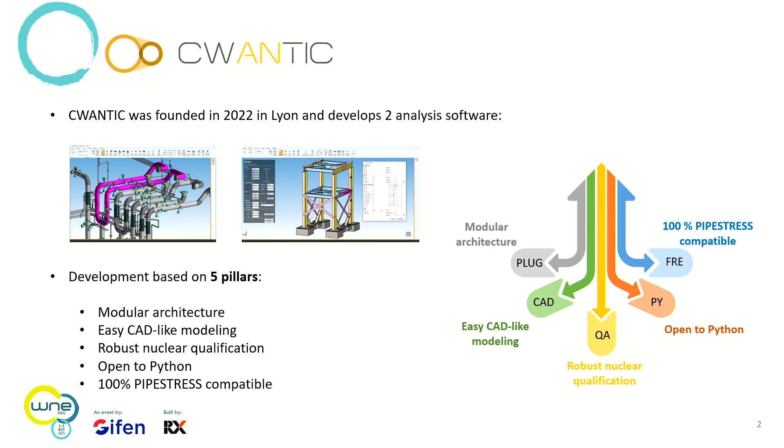Let's come to the core of the presentation, the RCC-MRx code. The RCC-MRx code is a French code that provides rules for the construction and design of high temperature equipment. It's particularly aimed at applications like high temperature SMRs.

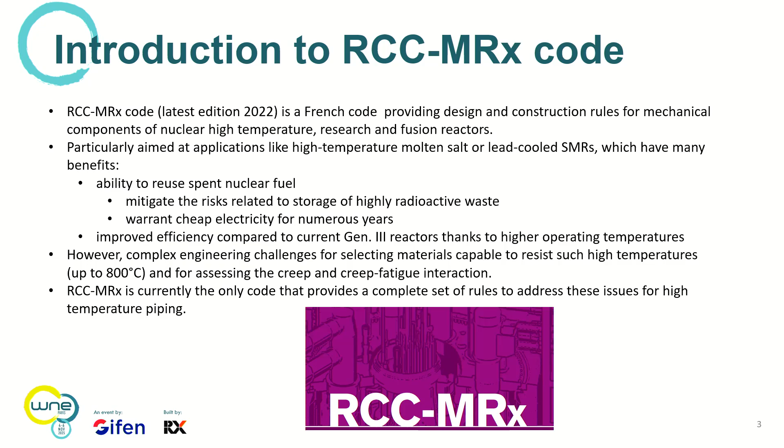As you know, they have many benefits: the ability to reuse spent nuclear fuel, improved efficiency compared to the current plants, Gen 3, because of the higher temperature, of course. However, it comes with many complex challenges.

The first challenge is to select materials able to resist such high temperature. The other big challenge is to assess creep and creep fatigue interaction. As far as I know, the RCC-MRx code is the only code currently that provides a full set of rules to address those issues, and that's the reason why we decided at CWANTIC to implement the code into our software MetaPiping.

I'm not going to give you a lesson about the RCC-MRx code, it would take hours and hours, but just two very important topics addressed in the code. The first topic is creep and creep plus fatigue interaction.

For steel, creep is significant above a temperature of about 450 degrees. Creep can lead to progressive deformations and then to rupture, so it has to be drastically limited. In the RCC-MRx code, this is assessed by means of two numbers: the creep usage factor U and the creep rupture factor W.

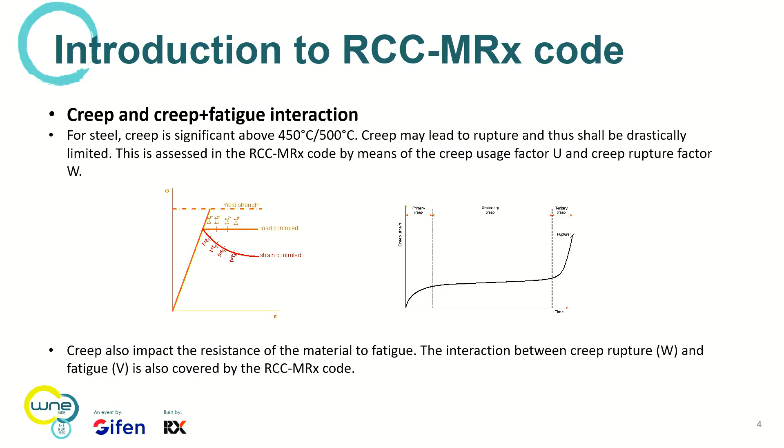We also have to take into account creep for the fatigue analysis, because there is an impact of creep on the fatigue resistance of the material. This is assessed in the code by means of the interaction diagram, fatigue and creep.

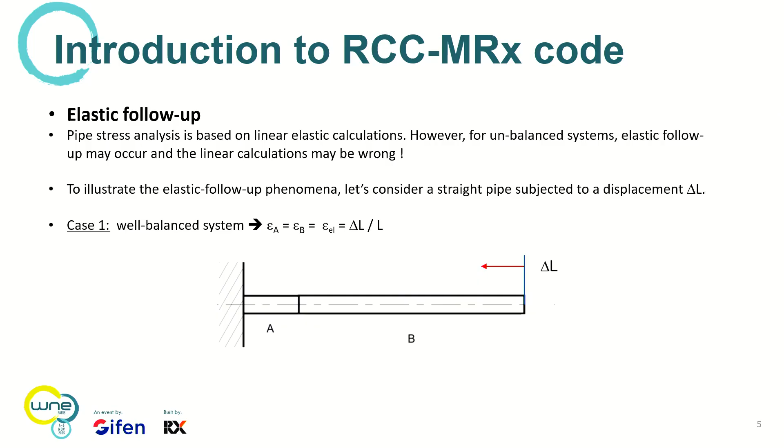Another important topic in the code is what we call the elastic follow-up phenomena. As you may know, pipe stress analysis is based on linear calculations. However, that can be unconservative and wrong if the system is unbalanced. I'll give you a little example to illustrate that.

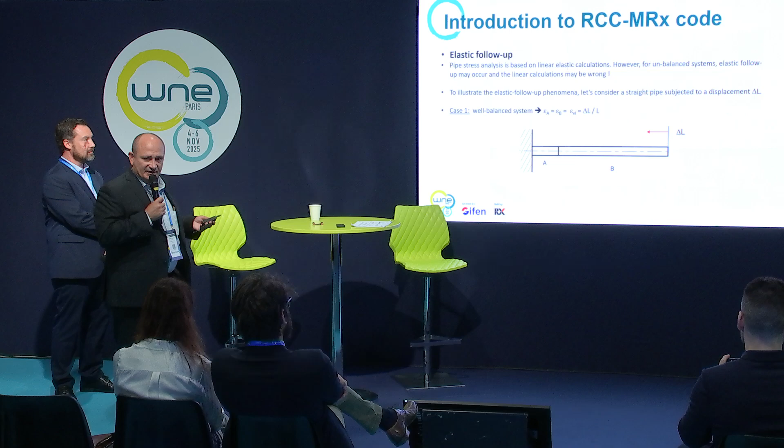In the first case, we have a perfectly well-balanced system. Part A and B have the same cross-section. So if you apply a loading, for example a displacement delta L, the strain calculated elastically will be the same as the real strain. Now, the second case is an unbalanced system.

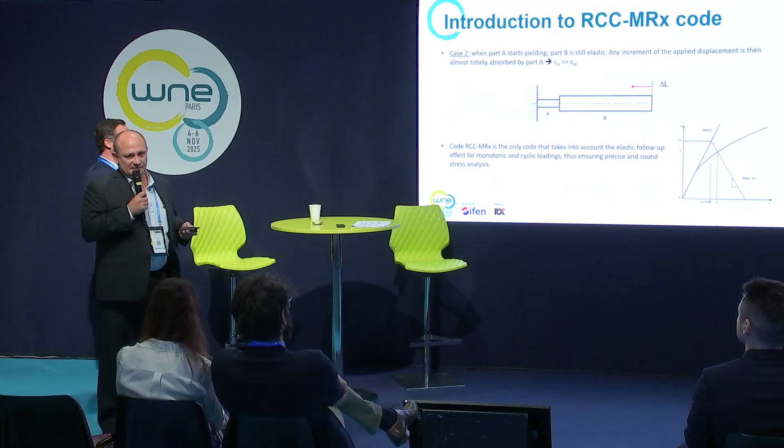The cross-section of part A is much smaller than the cross-section of part B. If you apply a loading, for example a displacement, the strain calculated elastically will be unconservative. It might be much less than the actual strain. So if you want a sound and precise analysis, you have to take this phenomenon into account.

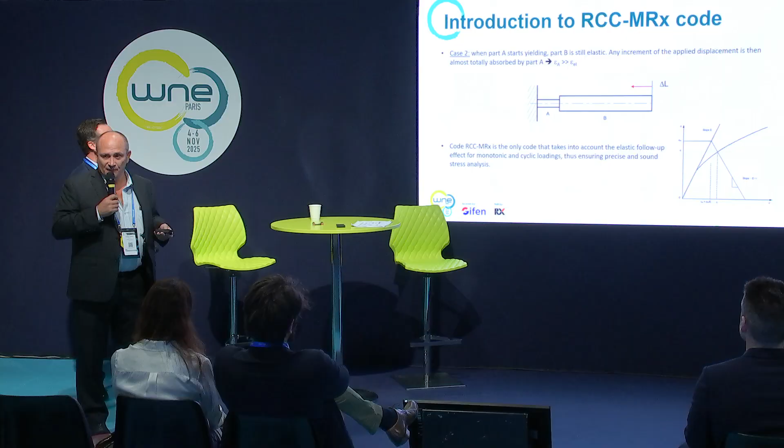The RCC-MRx code provides some methods to take this phenomenon into account, by means of what we call the elastic follow-up factors for monotonic and cyclic loading.

Let's have a look now at the implementation of the code into MetaPiping. The first thing we had to do is build a library of materials, because for the RCC-MRx code we need a lot of data: the creep-fatigue interaction, the creep laws, the interaction diagram, and so on. It's practically impossible to have the user enter all this data, so we decided to build a library with most materials used.

And for the user, it's pretty easy. You simply have to select the specification, and all the data are readily available.

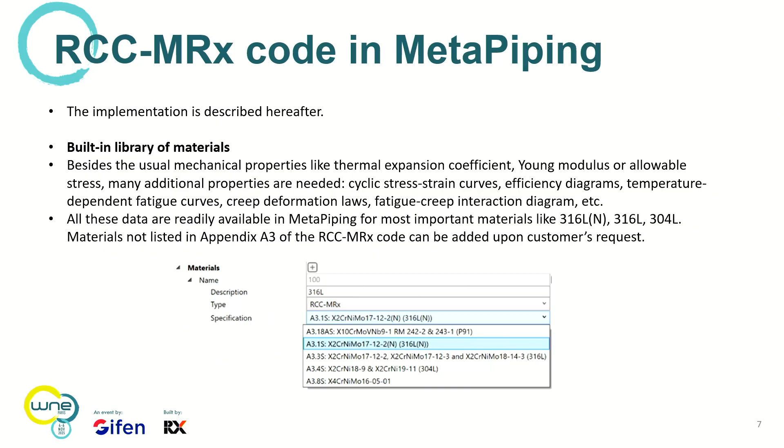The second thing we have to do is to define the geometry and the loading. That's pretty similar to what you have in other piping codes. There is no big difference.

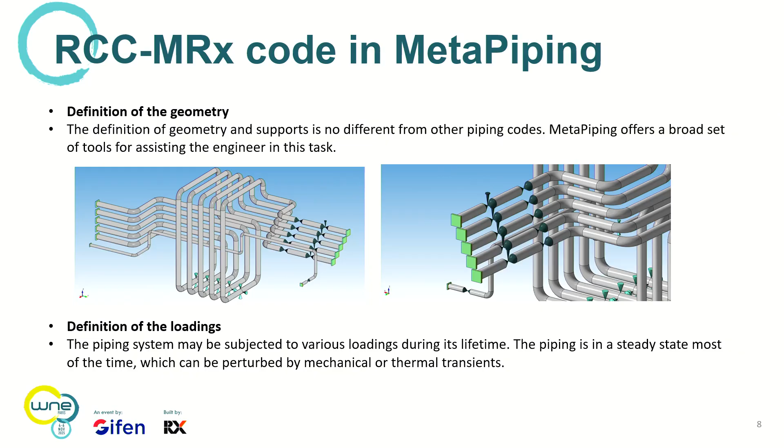However, you have to describe the steady-state conditions accurately, in particular the duration. It's very important for creep.

And the second thing you have to pay attention to is the definition of the transient conditions, the transients. In MetaPiping, this is done by means of what we call a load set. And the load set has to take into account the fluid transients. When you have a temperature of fluid transients, of course, you have thermal gradients across the thickness, and they have an impact on the fatigue, the cyclic analysis.

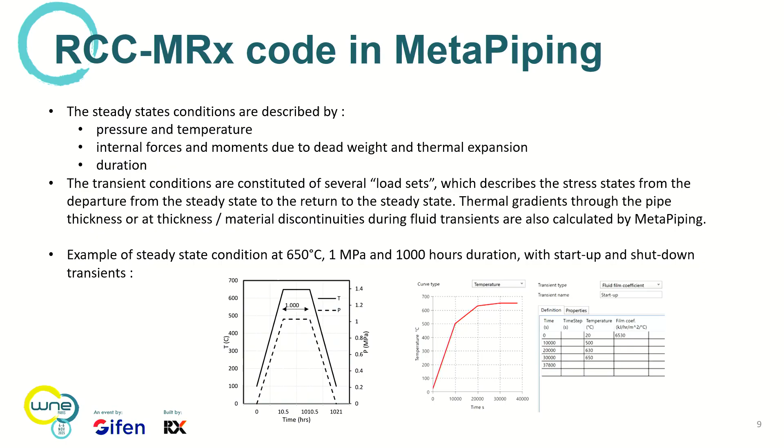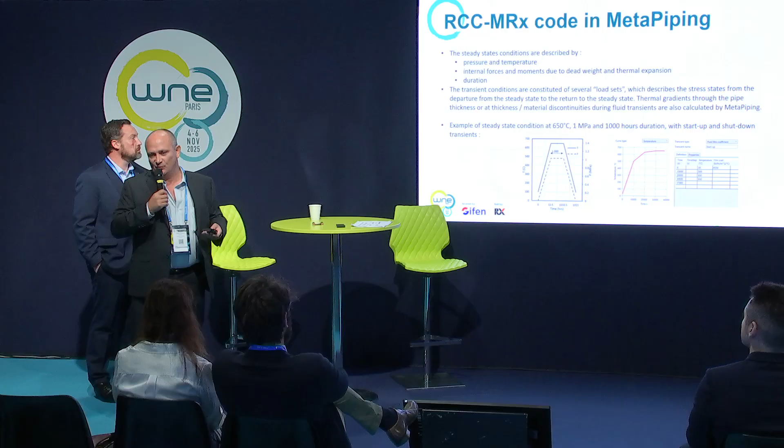And this is an example of steady-state conditions, 650 degrees, with two transients, startup transients, shutdown transients. In MetaPiping, that's pretty easy to define those transients, and automatically MetaPiping will take the thermal gradients into account in the cyclic analysis.

Once the loadings and the geometry and the materials are selected, we come to the calculation according to the RCC-MRx code. And the first thing that is carried out in MetaPiping is the check of significant creep. And that is performed according to Appendix A3.31.

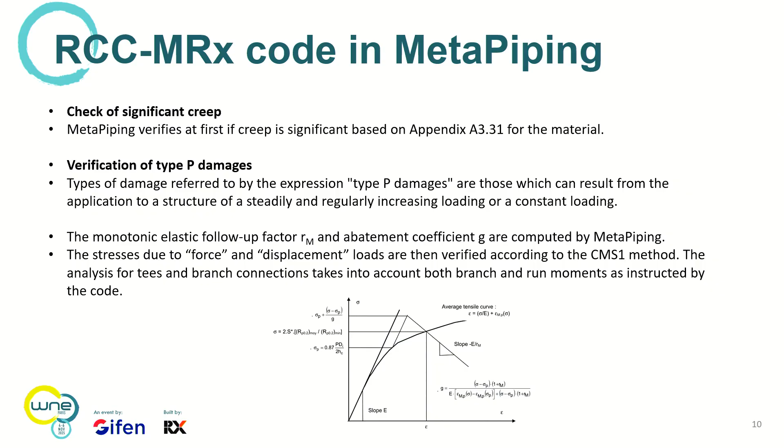The next step is the verification of the type P damage. So what we call a type P damage is a damage that is due to the application of a steady or almost steady loading. For example, thermal expansion, dead weight, and so on.

And to do that, MetaPiping calculates what we call the monotonic elastic follow-up factor, RM, and the abatement coefficient, G. And using those numbers, we are able to evaluate the stresses according to the CMS1 method. And then, of course, to make sure the damage are acceptable.

If creep is significant, we have also to evaluate the creep usage factor, U, and the rupture factor, W. And we have to do that for all the steady-state conditions. The creep usage factor, U, has to be lower than 1 minus delta UA.

And the calculation of delta UA is pretty complex. It's really complex. It involves a lot of iteration. And in MetaPiping, this is done in the most rigorous way, I would say, without any simplification.

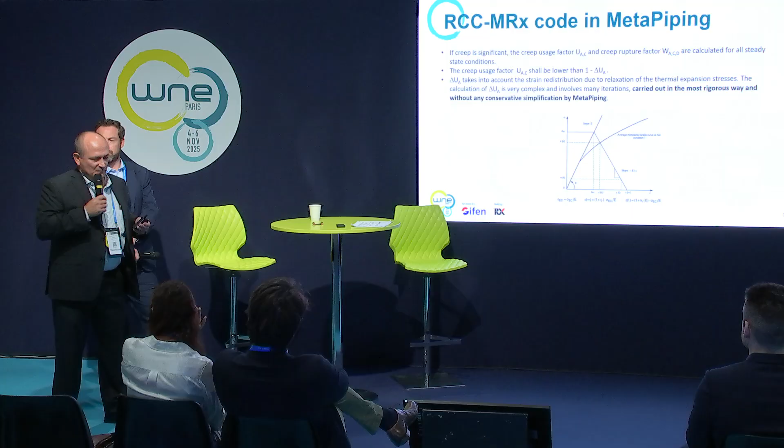The next step is the verification of type S damages. So type S damages are about stress variations. And in fact, there are 3 different failure mechanisms we have to verify.

The first failure mechanism is progressive deformation. Then the second, fatigue. And the last one is creep rupture.

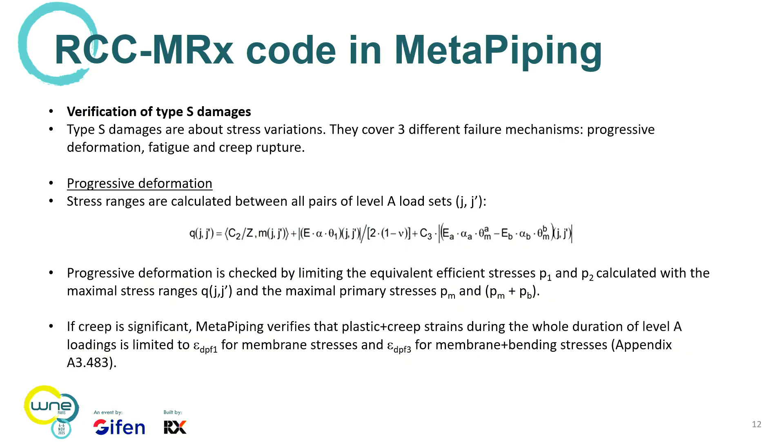So for the first mechanism, progressive deformation, MetaPiping will calculate the stress range that we call Q between all the possible states, all the possible load sets. And based on the maximum value of Q combined with the maximum primary stresses PM and PM plus PB, we determine the equivalent efficient stresses P1 and P2 that have to be limited to a maximum value depending on the material and the temperature.

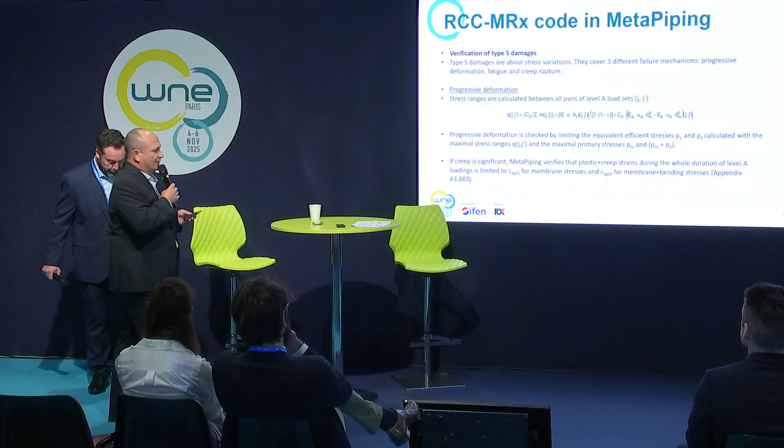If creep is significant, we also have to verify that the plastic plus creep strains during the whole level A loadings is limited to a value, epsilon delta P1 and epsilon delta P3, that also depend on the material.

So now we come to fatigue. The way fatigue is addressed in the RCC-MRx code is pretty similar to what you can find in other codes like RCC-M, ASME. So of course you have to determine the maximum, the peak stress variation between all the states, the stress states that we call SN and SP.

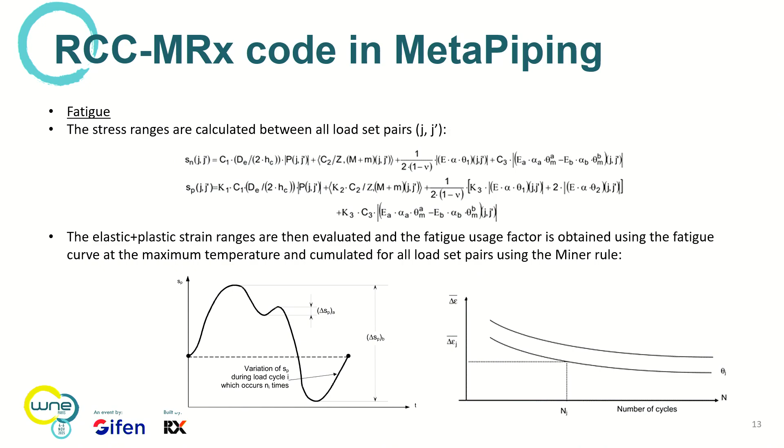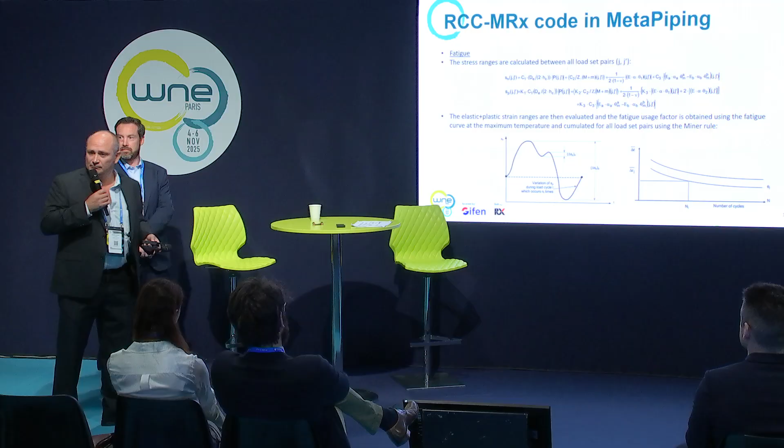And as illustrated in the diagram below, you have to figure out what is the maximum stress or strain variation between the load sets, enter the maximum variation in the fatigue curve, and then based on that, calculate what we call the cumulative usage factor using the Miner's rule. So that's pretty usual, I would say.

There is, however, a big difficulty when you do that, which is to avoid over-conservative counting of cycles. And this is illustrated in the figure here below.

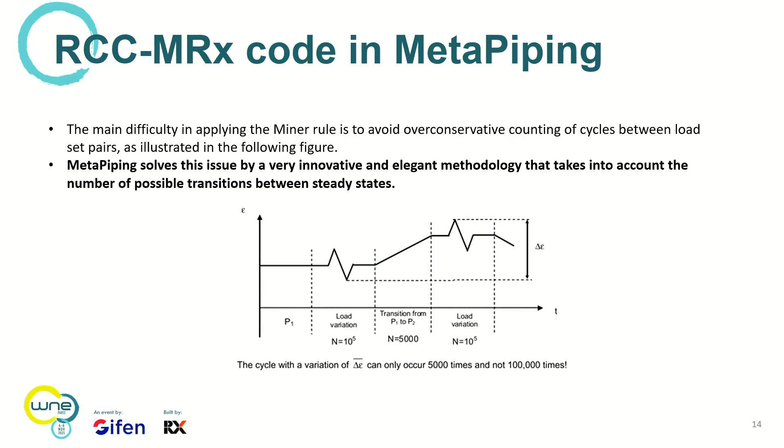Let's imagine that we have a steady state P1 and a transient that occurs 100,000 times. You have another steady state condition, P2, with another transient that occurs 100,000 times. So I have a quiz for you.

How many cycles can you form between the peak values, delta epsilon? Well, the first obvious answer is 100,000. Unfortunately, that's wrong, because the number of transitions between state P1 and P2 is actually limited to 5,000.

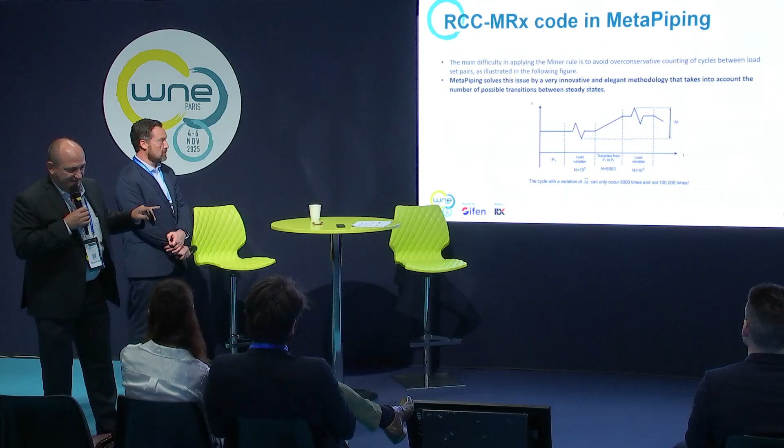So you can see that this has a huge impact on the fatigue analysis. And what we have done in MetaPiping is to identify the transitions between steady state conditions in order to take this issue into account.

Then we come to creep. If creep is significant, we have to check the strain due to creep in the holding time that follows a load cycle, and we have to take it into account in the fatigue analysis as well, adding the creep strain to the elastic and plastic strain.

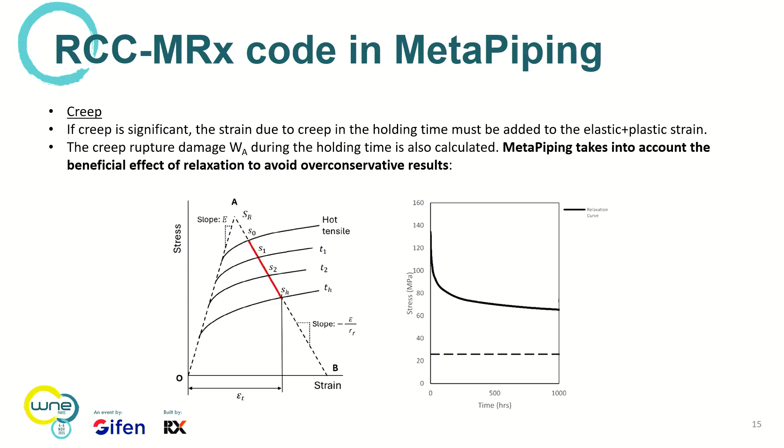There is another number we have to calculate: what we call the creep rupture damage, W, during the holding times. To do so, in MetaPiping, we take into account the beneficial effect of relaxation. In most software, you simply take the maximum value and consider it constant, which gives an over-conservative result. Here we really take into account the fact that the stress will decrease due to relaxation.

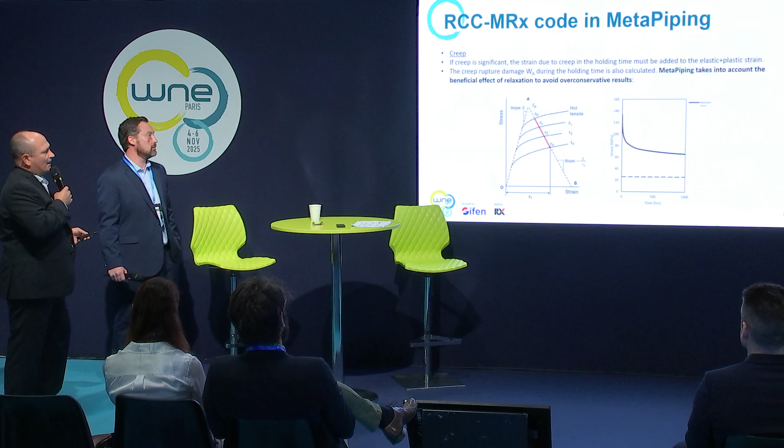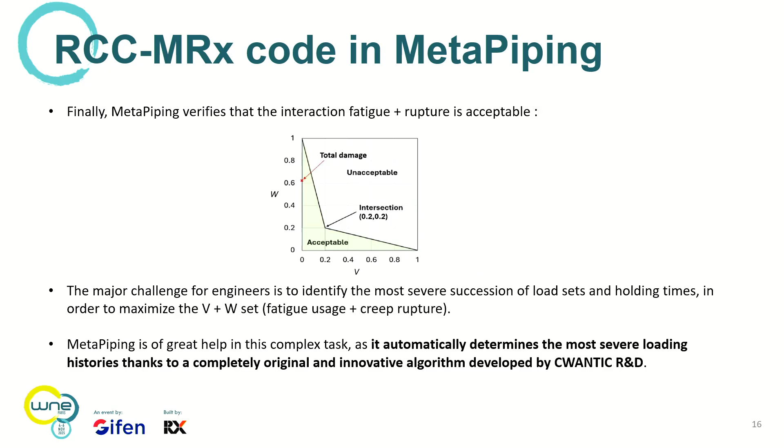You see that all this is pretty complex, a lot of calculations. But that's not the most complex issue we have to solve, because the code asks you to figure out what is the worst history, the worst succession of load sets and holding times, in order to maximize the V plus W set. That's an extremely complex issue.

In MetaPiping, we have developed a special algorithm, completely original and we think innovative, that allows us to determine this loading history in order to maximize the fatigue plus creep effect.

So now I let Mr. Noé speak about a real-life application of the MetaPiping software and the RCC-MRx code.

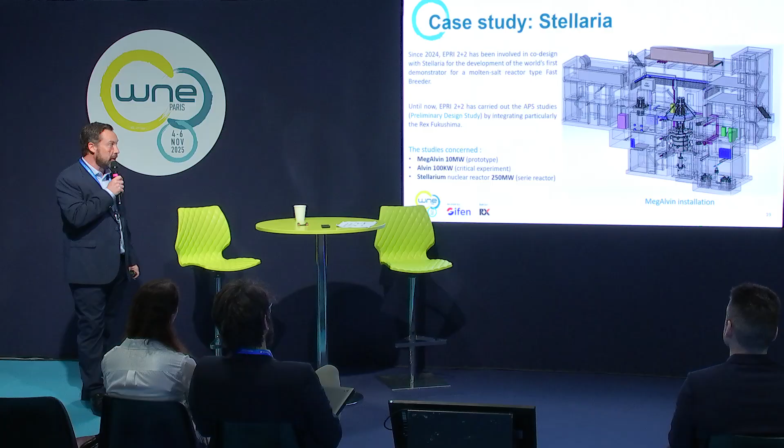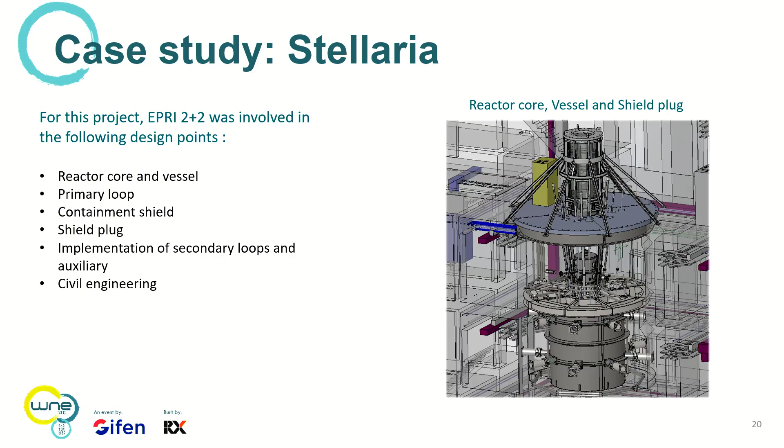Et donc nous, au sein d'EPRI 2+2, sur ce projet, on s'occupe de tout ce qui est développement du réacteur, en partenariat avec Stellaria, du réseau primaire, du château de plomb, de tout ce qui est réseau secondaire, et de l'implémentation du génie civil et des différentes protections.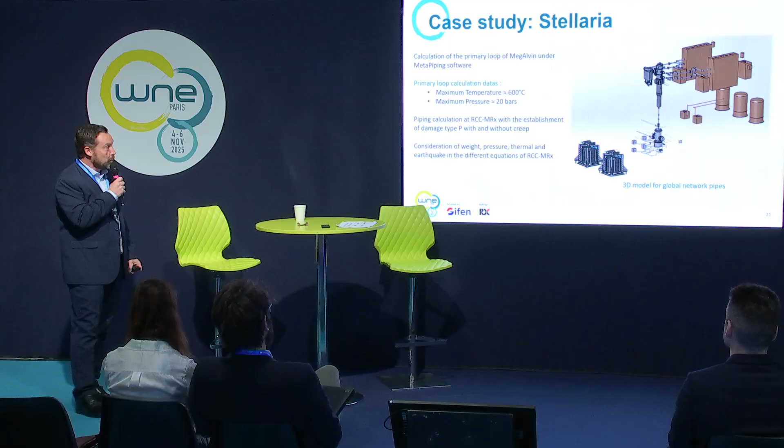Donc le cas d'étude qui s'est fait sous RCC, sous MetaPiping, c'est le calcul du réseau primaire de MegAlvin, avec des températures qui vont à plus de 600 degrés et une pression d'environ 20 bars. On a pu établir grâce au logiciel de CWANTIC les dommages de type P avec et sans fluage. Et donc on est en cours après pour la suite.

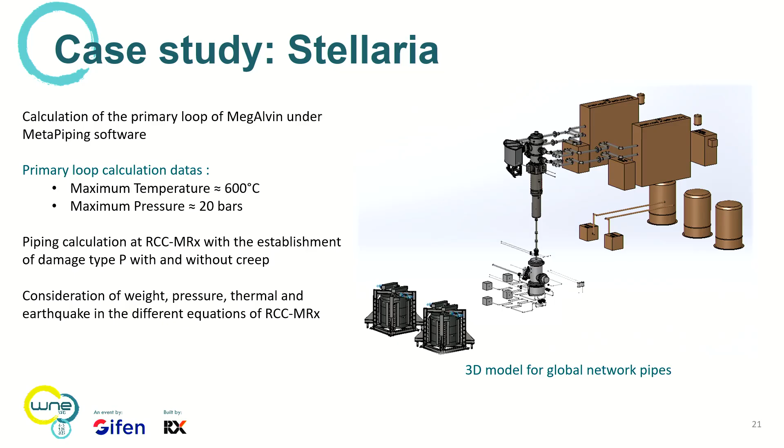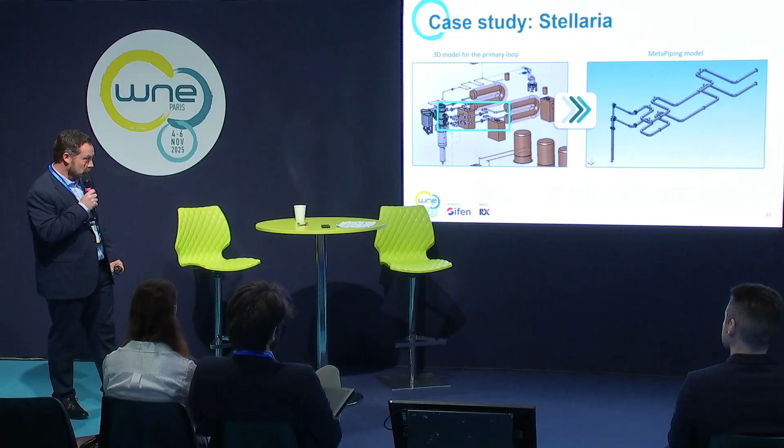Donc là on peut voir à gauche le 3D et à droite la modélisation que l'on obtient sous MetaPiping avec les différentes conditions limites. Et le cheminement avec des thermal loops, des lyres, qui ont déjà été mis en place, puisque là c'était après itération, et les différents supportages qui ont été mis en place.

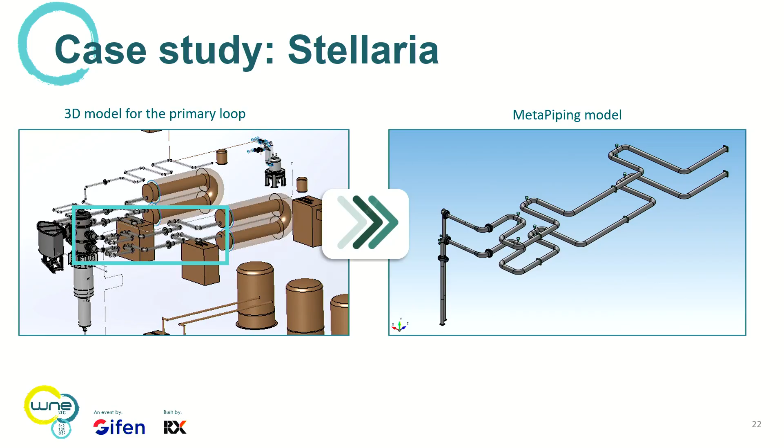Donc ce qui est bien avec le logiciel de CWANTIC, de MetaPiping, c'est que pour le calcul sous RCC-MRx, c'est la facilité de pouvoir établir toutes les équations qui sont faites presque automatiquement et avoir aussi tout le détail de tout, comme l'a expliqué Joseph, tous les facteurs qui rentrent en compte dans le calcul de ces équations, que ce soit le facteur d'usage, l'effet ressort.

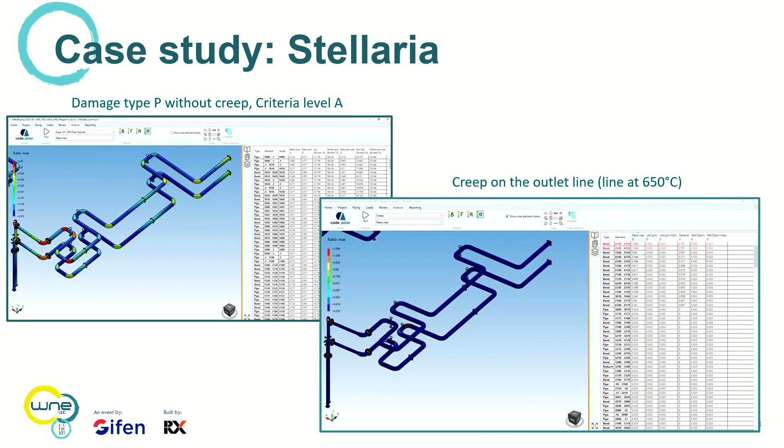Le coefficient d'abattement, le coefficient G, qui sont plein de coefficients qui rentrent en compte dans les différentes équations, que ce soit pour les dommages de type P, le coefficient d'abattement, le coefficient G rentrent beaucoup en compte dans les contraintes de type PM plus PB.

Et nous avons en bas à droite après le calcul en fluage, en dommage de type P avec fluage, pour les lignes à 650 degrés, donc là où on va calculer les UAC et les delta UA. Voilà, les différentes choses comme ça.

Je vais laisser la parole à Joseph qui va présenter le fonctionnement du logiciel.

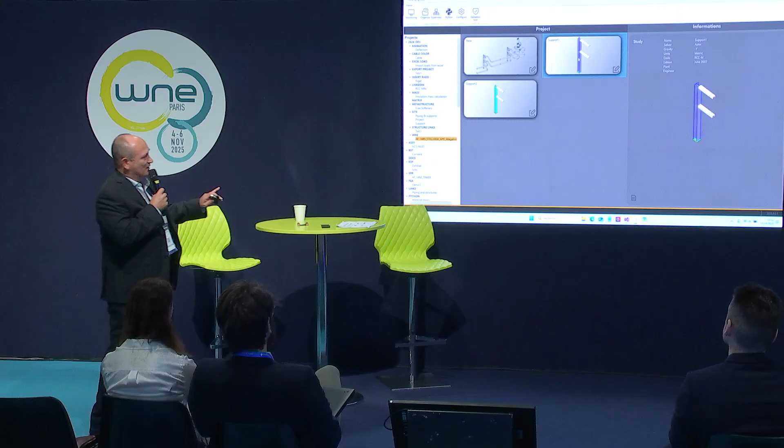Yeah, thank you. I would like now to show you a short demo about how the MetaPiping software works, or how it looks like. So that's the next video. You can see the project. In this case, it's a full project with the piping systems and the support.

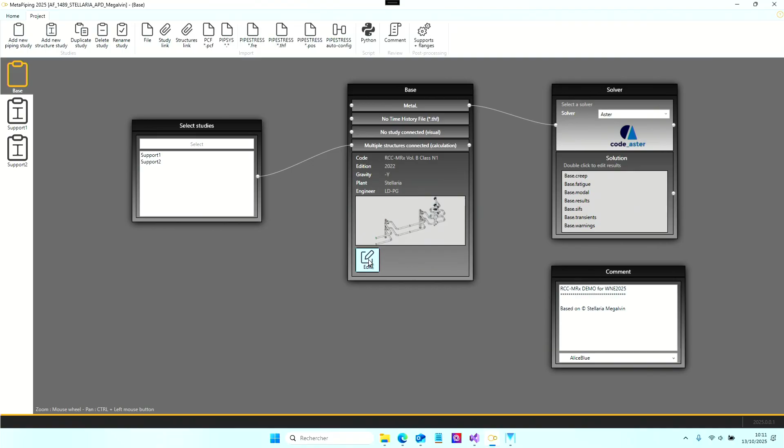Here you can model the supports with MetaStructure. The supports are connected to the piping, so that will let us perform a coupled analysis, and there we come back to the piping study with the coupled support. Here you can see the complete systems, and we have a lot of tools just to define the geometry, to show the support.

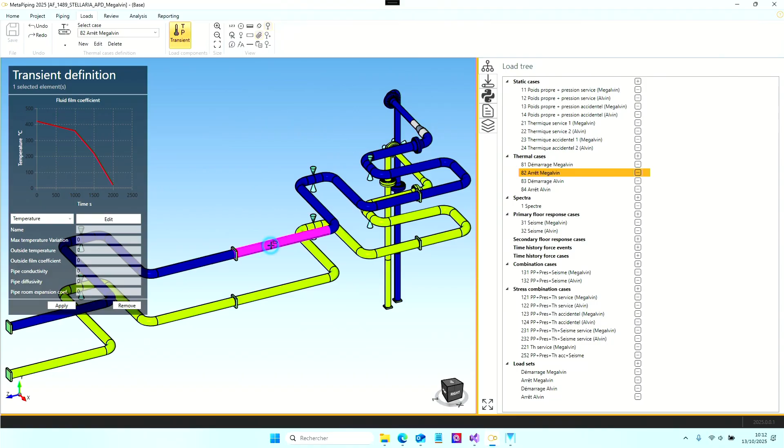Here we have the definition of the load cases, static load cases, thermal transient, and you can see how it is. So we have two loops, the cold and the hot leg, sorry. Here we can define the temperature transients. You see how easy it is.

Then we have all the combinations for the stress verification, so the type P damage usually. And here we have the definition of the load sets. That's for the cyclic analysis, for the fatigue analysis. So we define everything, all the load cases, thermal transients.

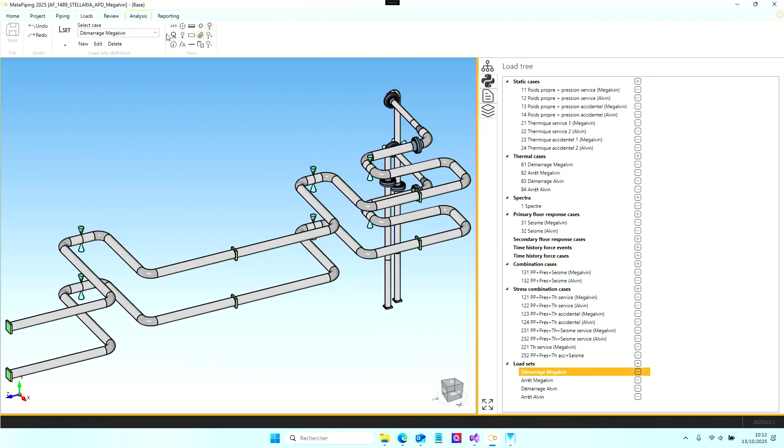Once everything is defined, we can go to the analysis and display, for example in this case, we can display the mode shapes, the results for the dead weight analysis, with all the detailed results on the right with the text report. On the left, you have the graphical display. Okay, you can see practically all the numbers you need for the detailed analysis.

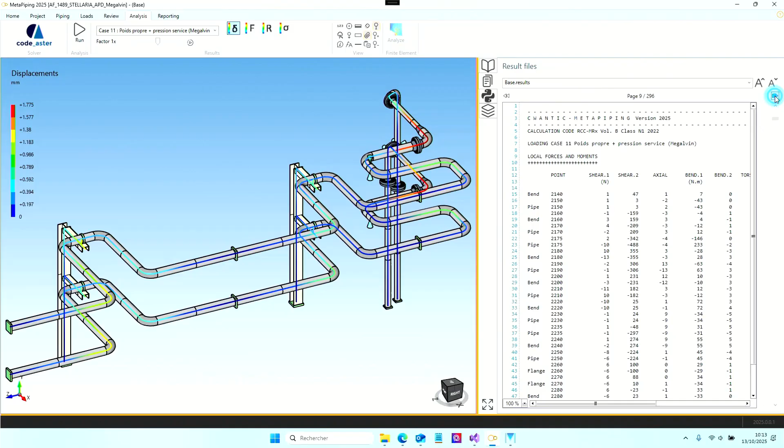Yeah, this is about fatigue analysis. You have the modal extraction, the detailed results, deflected shape, internal forces and moment, the reactions, all the detail of the stress analysis.

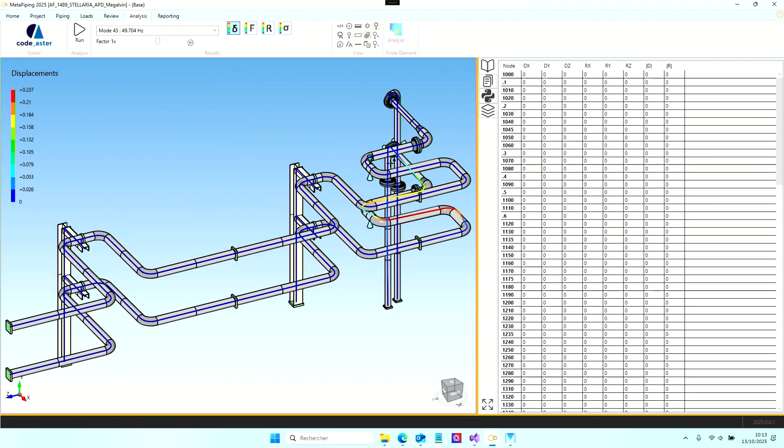Here the SIF, the transients, or the thermal transients with the delta T1, delta T2 as a function of time. So that's pretty detailed. And okay, I'm going to show you now mode shape with the animation just to have insight how it vibrates. So you see, you have all the graphical tools to manipulate the model, to check the results. That's pretty easy.

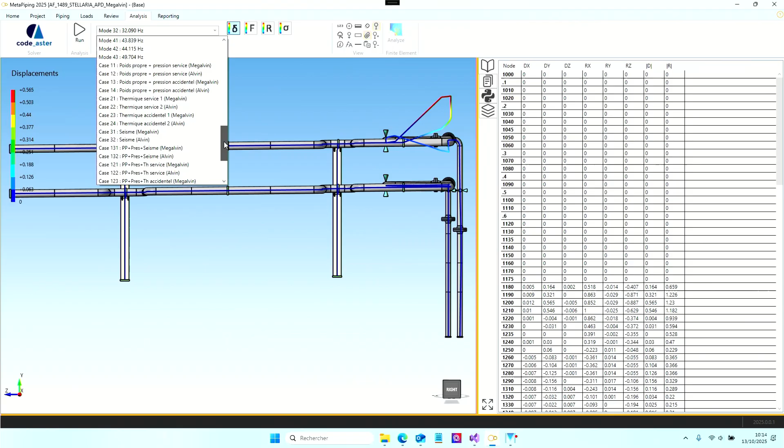Okay, stop. So next, we'll check another combination: dead weight plus pressure plus earthquake. In this case, we have the type P damage with the abatement coefficient.

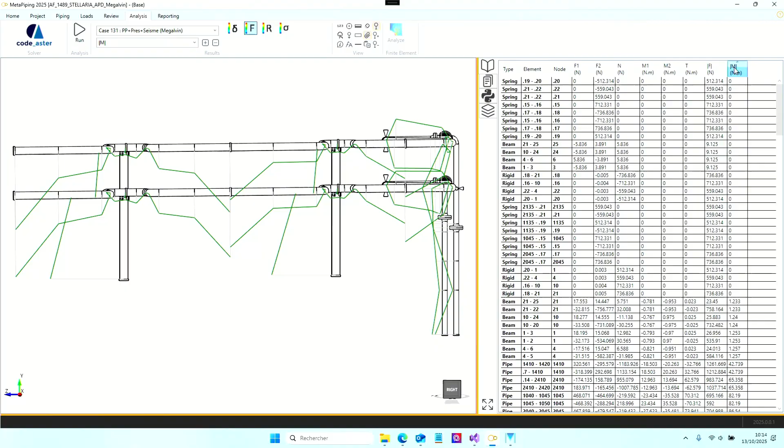We are going to display the abatement coefficients here. Of course, before that, you can show the internal forces and moment thanks to the moment diagram on the left and the numerical values on the right in a table that you can sort, export to Excel, and so on. You see how easy it is. We can also display the reactions, obviously, for the support analysis.

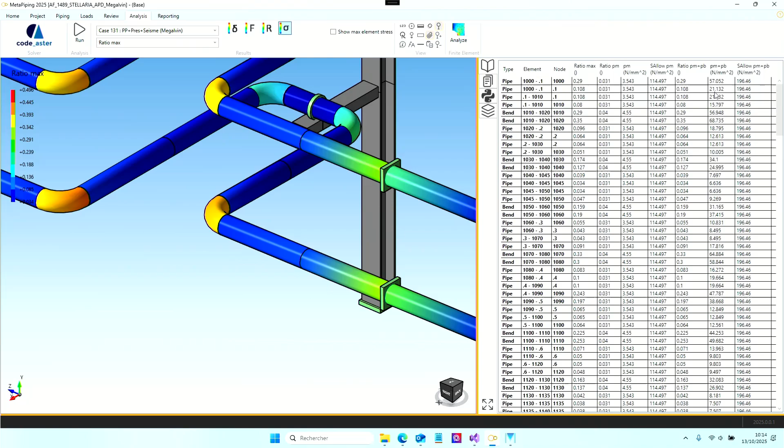And maybe most important, the stress ratios. So on the right, you see all the details and numbers that you can double check. And of course, on the left, you have a colour map.

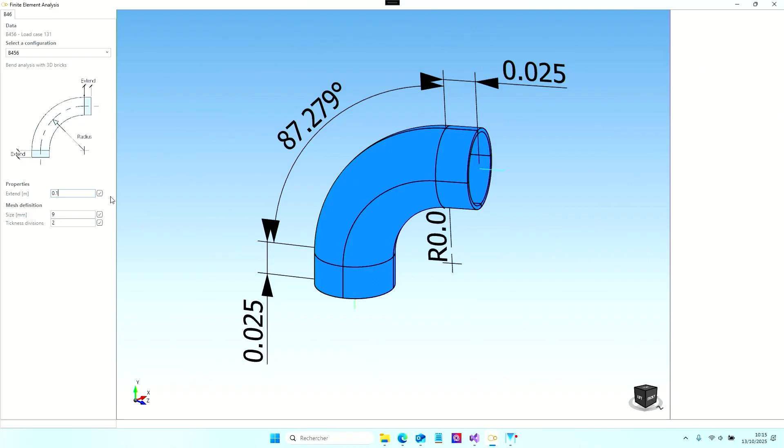Something very useful, in fact, is the detailed FEA, finite element analysis, of a component of the piping. So here we are going to perform evaluation of the limit load thanks to nonlinear analysis: large deformation, large displacement, and nonlinear elastic-plastic material. That way you can mesh the elbow.

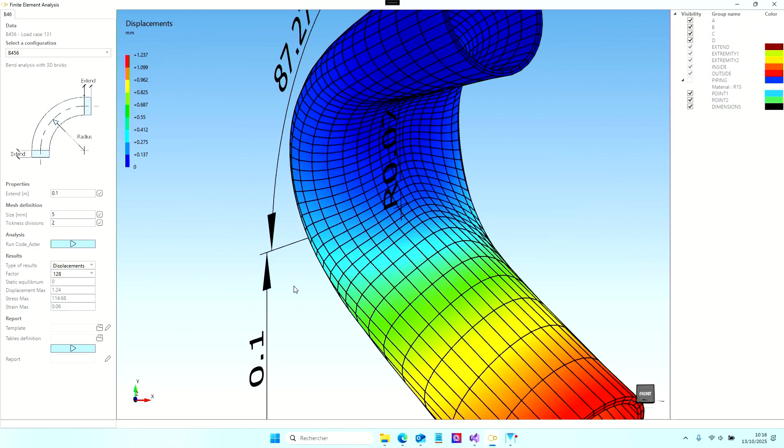Look at the deformation, so you can notice the ovalization effect. It's very much magnified in this case. And here the stress.

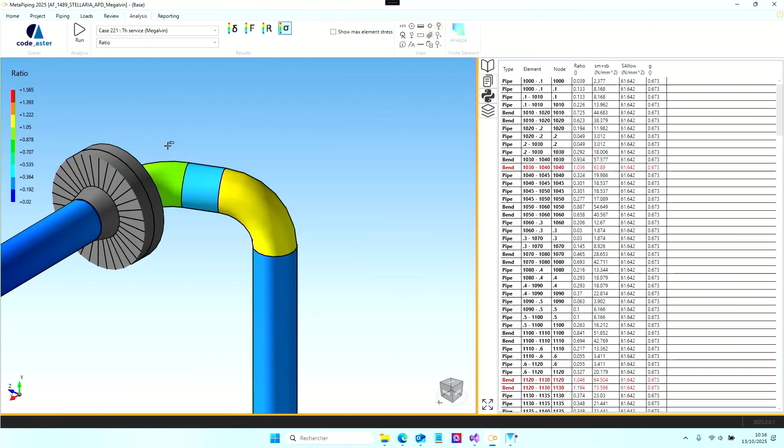You can hide some parts of the elbow just to see inside, to verify the stress distribution and make sure that we are below the plastic moment. That's kind of a limit load analysis. This feature is available for tees, for reducers, and so on, and it will be extended in the next version, of course.

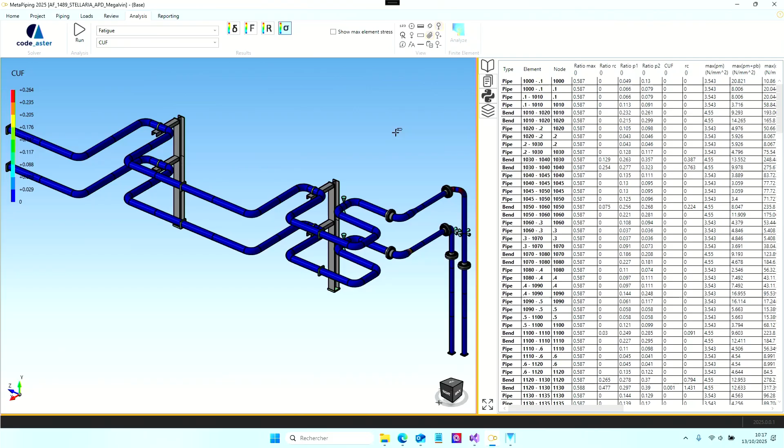Here you can visualize the abatement factor G. The detailed fatigue analysis with the maximum ratio and all the numbers, the usage factor, the interaction V plus W, all the details on the right. And of course, you have also detailed reports, and you can sort the tables. You see in red everything that exceeds the allowable limits.

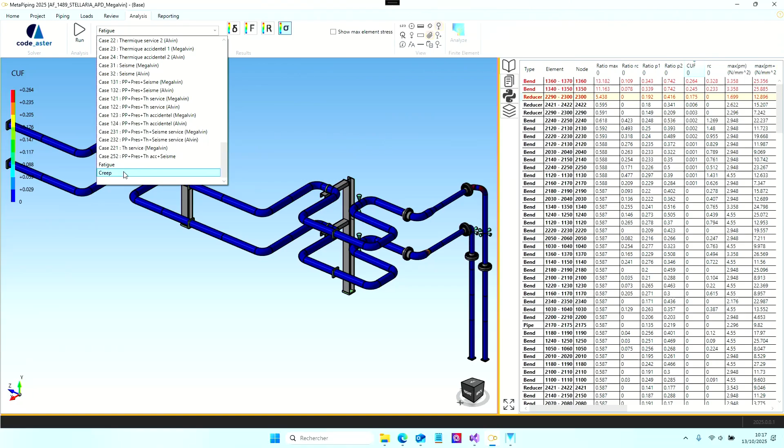Now we have the same for the creep, in particular the delta UA. I told you about the calculation. And you see here the delta UA is mainly important at the elbows.

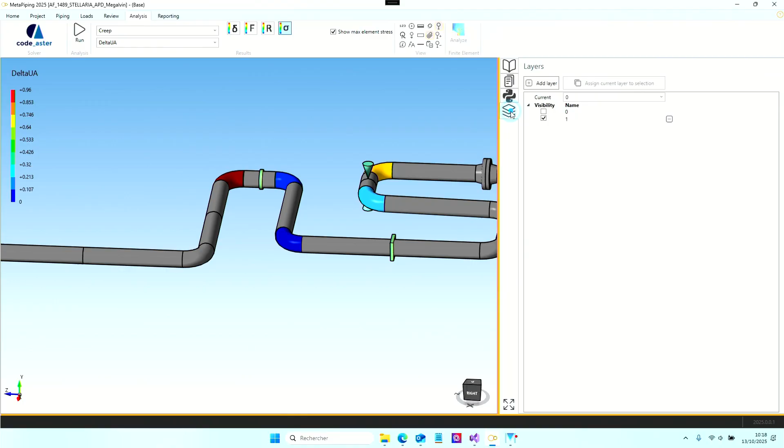And yeah, we have also in MetaPiping a layer management that allows showing some part of the piping. You have very complex piping, and it's very easy to show and hide some parts of it.

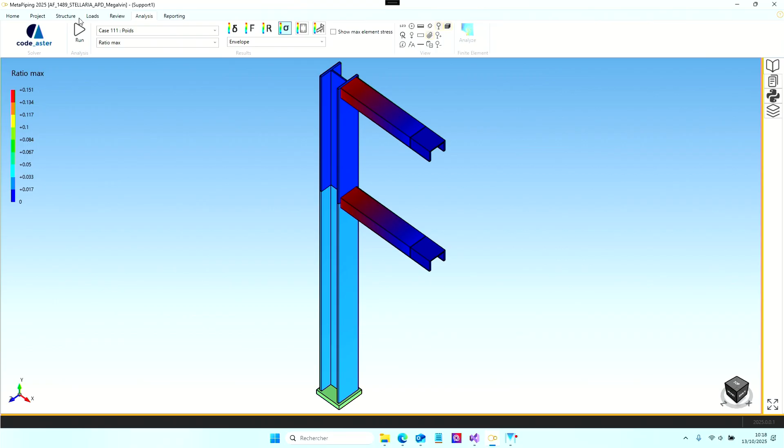Here we'll come back to the support analysis, because here what we have performed is a coupled analysis, supports and piping, to see the impact of the supports on the piping analysis. So here the usual way to display the stresses, the reactions, and so on.

And that's it. So a few words of conclusion. In fact, we are pretty proud to say that MetaPiping is, for the moment, the only software to offer the full implementation of the RCC-MRx code.

If you look at the software market, there are also software that pretend to have the RCC-MRx code, but in fact, if you look at the details, you'll notice it's a partial implementation, for example only type P damage. Here we are the only one that offers the full implementation, from type P to type S, with and without creep.

And I hope I've convinced you that MetaPiping is a must-have tool if you are involved in the design of high temperature reactors. But in addition to the calculation capability, we have focused development on user friendliness, so it's pretty easy to use for new engineers entering the nuclear industry.

And what is very important too is the interface between MetaPiping for the piping analysis and MetaStructure for the support. So we are able to offer a coupled analysis, piping and support, to take into account the flexibility and inertia of the support. That's something brand new, in fact, that we are quite proud to offer.

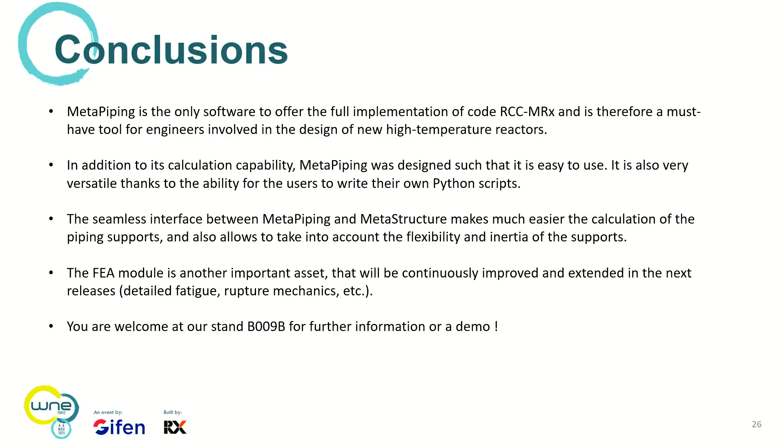The FEA module I showed you is another important asset. For the moment, we are limited to the evaluation of the plastic moment, so the limit load, but this feature will be increased and extended in the next version.